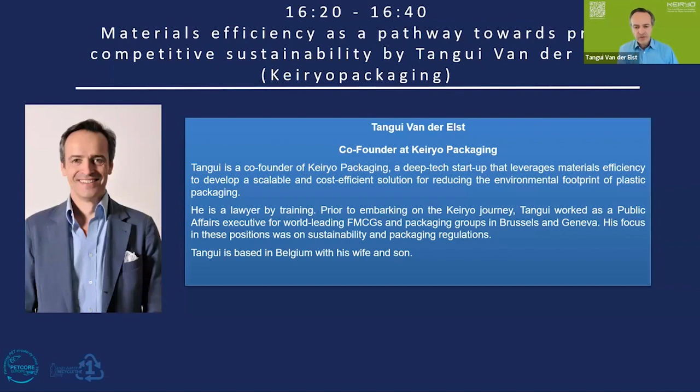So let me start with our presentation, Keiryo Packaging.

Just for clarity, I'll start with what we're not. We are not developing a new material, and we are not developing an additive. We are developing a processing technology that increases the performance of polymers.

That's what allows us to claim that our technology reduces the environmental footprint, but also the manufacturing cost of plastic packaging. If you look at the big picture of what we are seeking to create...

The founders, including myself, and the funders of Keiryo Packaging all have a background in the fast-moving consumer goods industry, more specifically in one company called AB InBev.

As you know, Roberto Johan, the CEO of our company, was head of packaging innovation at AB InBev a while ago, when there was a big push to develop PET for beer, not for Western Europe, but for other markets.

From that perspective of being responsible for innovation for a large FMCG company, he made this global perception that if you want a relevant sustainable innovation, you need to square a few challenges. First, you need a technology that reduces the carbon footprint and increases sustainability, but also that is cost efficient, because cost is a very important dimension in our supply chain.

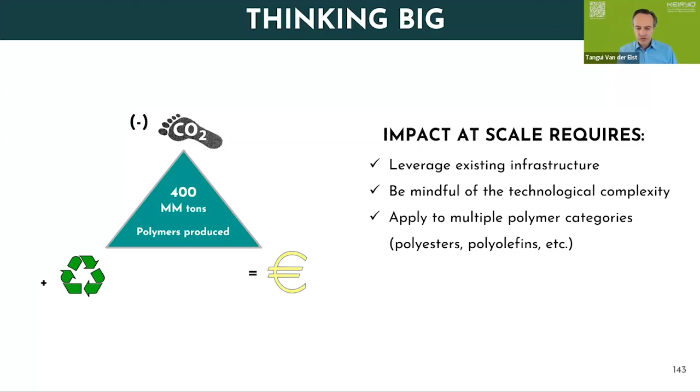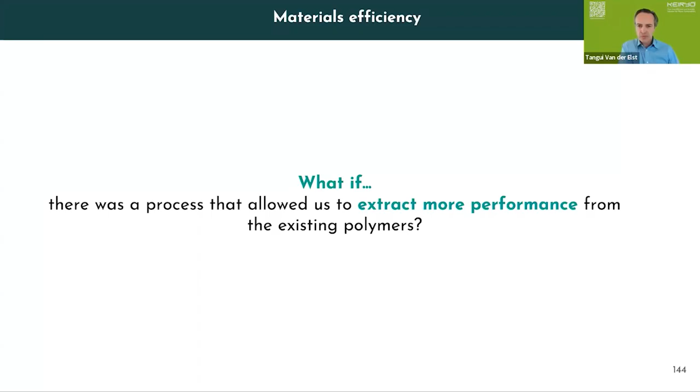And the second what-if was: what if there was a process that allowed us to extract more performance out of existing polymers? That would allow us to use existing infrastructure, you would not have to go through new regulatory validations, and because you have more performance, you're likely to have something cheaper and scalable.

Nature tells us something very simple: the performance of a material is defined by its morphology, the balance between crystalline and amorphous materials and how they are organized. Nature also gives a very good example of what that actually means.

If you look at the molecule of carbon, if you have carbon with a low level of molecular organization, you have coal. If you have the same carbon with a high degree of molecular organization, you have a diamond, which is better when you are in the market for an engagement ring. But fundamentally, it is the same material.

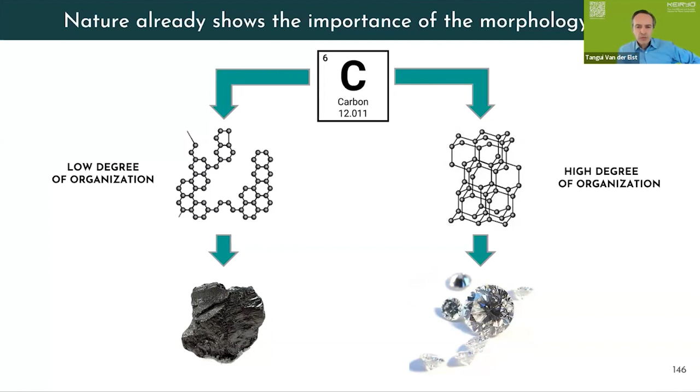What we have done is we have taken this principle and used it to convert the level of organization of polymers. It's a processing tool, and during the processing phase, the polymer is pushed through our device. What happens is that the low level of organization is transformed to a higher level of organization, meaning a different structure of crystals, a different way the amorphous components are organized.

This technology is based on well-established science, called flow-enhanced nucleation and induced crystallization. This science tells you that polymers have the ability to alter their crystallization kinetics and resulting microstructures when subjected to deformational flows.

Now I just want to open a caveat here. When we talk about crystallization, there's often a misunderstanding, because crystallization is not always seen as a positive development in industrial processing. There is a clear difference that needs to be understood between the best known crystallization, which is quiescent crystallization, and the crystallization that we leverage, which is flow-enhanced nucleation and induced crystallization.

If you have some time, go check our website. Our colleague Edita Niemczyk made a very comprehensive paper that explains the difference between the two sources of crystallization.

With flow-enhanced nucleation and induced crystallization, you control the flow to stretch and align the polymer chains to create a more uniformly spread nucleation, and generate crystalline structures that are smaller, better oriented, and better integrated in the polymer matrix. Whereas with quiescent crystallization, you have spot-like places of crystals that are not what you are seeking to achieve.

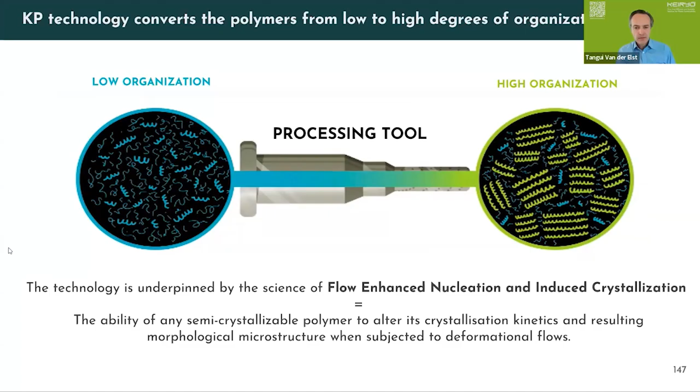What we have done today is demonstrate that we can apply this process to the field of PET injection stretch blow molding of bottles. If you look at the performance of a PET bottle, you're looking at mainly three buckets: top load, barrier properties, and thermal resistance. The amount of material you use is defined by the level of performance you need to achieve on these three items.

Today in our development, we have demonstrated that using a similar type of resin and on standard machinery, we can improve the thermal resistance of the blown article, and we can also improve the various barrier properties, whether it's oxygen, water vapor, or CO2.

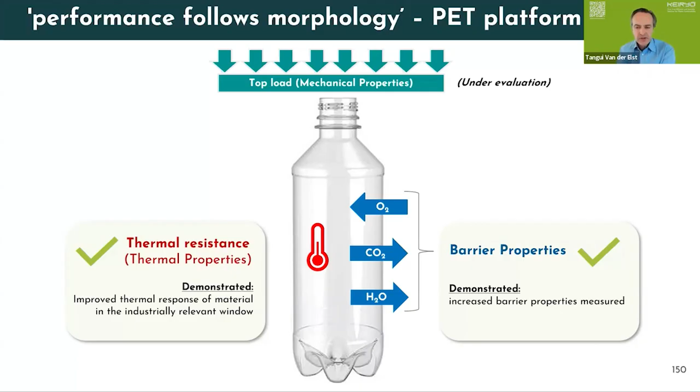The way this materializes, if you put it under a microscope: with the current process, you see this represents the morphological structure of a PET bottle. The blue rounds are crystals. In the current process, you have crystals of a certain size that define the passage that molecules of oxygen, CO2, and water will travel through to go through the membrane.

When you use the Keiryo technology to inject the preforms and then blow the bottles, you'll see that the size and amount of the crystals has changed. We have more crystals of a smaller size, which creates a more difficult passage for the various molecules. It's like a fishnet — if you reduce the size of the mesh, it becomes much harder for the molecules to pass through. And that's how you improve the performance of the material.

I will explain first how we managed to observe this, because this was in itself a challenge.

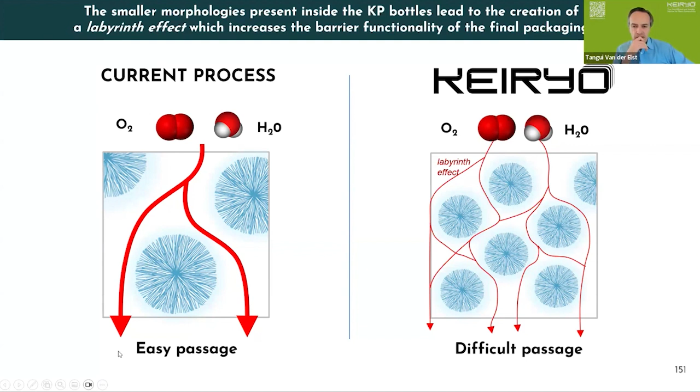Yes, so to measure this change in morphology, which leads to an increase of performance, we had to develop various evaluation protocols.

And rightly so. So we had to develop, next to measurements that are optical and thermal, protocols based on nuclear magnetic resonance to define the size of the crystals, and also X-rays to identify the orientation of the amorphous material. That allows us to have a picture, what we call the picture of the beast, which is basically seeing that when we use our technology, the morphology and the level of organization of the material is changed.

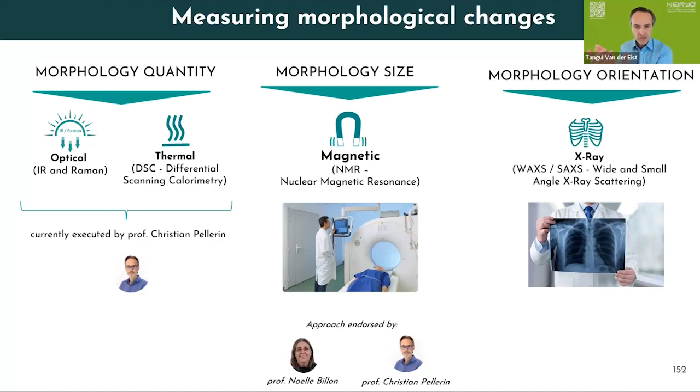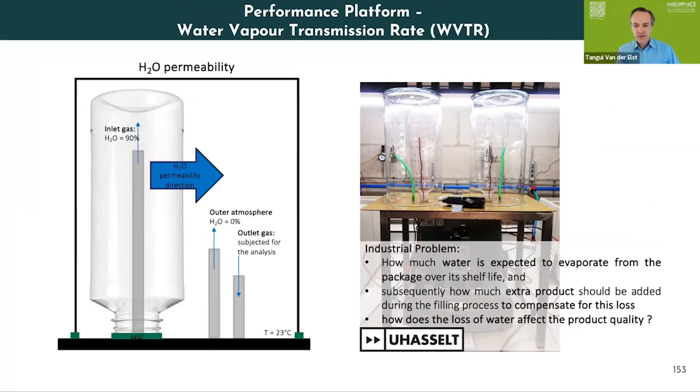We also obviously measured the performance, and for the sake of the presentation I will go fast on that. But basically what we do is benchmark preforms that are bottles made of preforms injected without our technology on the same machine, on the same resin, and then we inject with our inserts, and we compare the difference. We see an uptick in the various barrier performance, whether it's water vapor transmission or oxygen transmission rate.

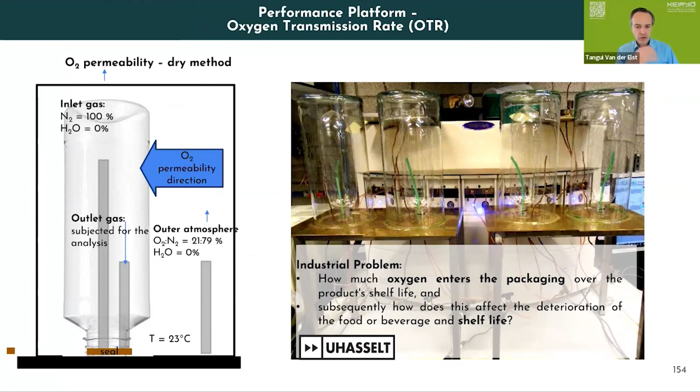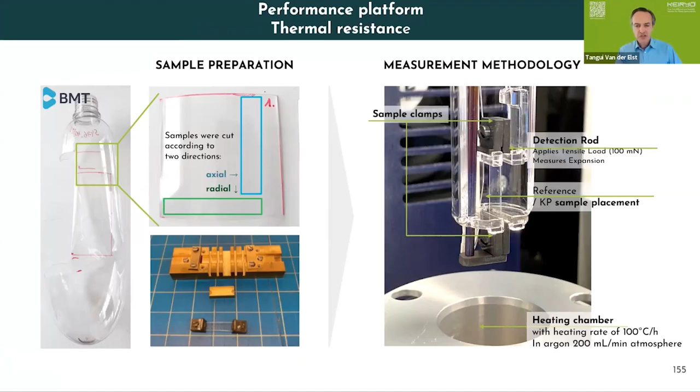Everything is done at the University of Hasselt, which has the right tool set to do these evaluations, but also of the thermal resistance. And what we've seen is that using our technology, you get thermal performance for a generic resin that is quite similar to what specialty resins are achieving.

What this leads to is, if you have an increased performance that is yielded by a better morphology, it unlocks two ways to create value. Either if you want to maintain the same level of performance, you will be able to achieve it using less material. That allows you to have, for each bottle, less CO2, a better footprint, but also a reduced use of raw material, which is thereby a cost saving. Or you can have the same amount of material, and then you will have better functional performance, which can impact the shelf life of your product if that is what you are seeking. But there are basically two pathways.

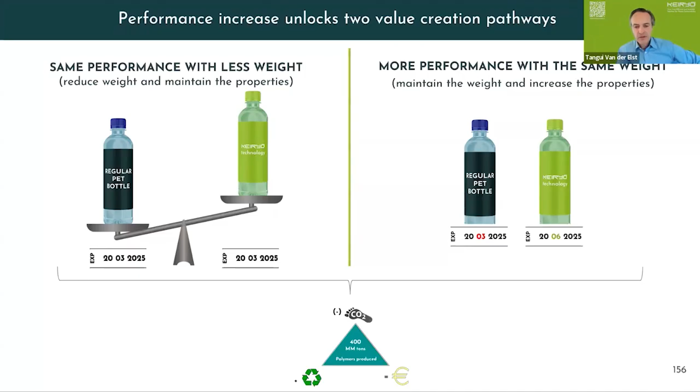Now, what we have achieved and what I just demonstrated so far is not the result of a test in the lab. This is the result of trials that have been executed in an industrial environment. On the picture here, you see the actual site where we are doing our trials, which is the factory of PDG Plastiques, which you might know. PDG is a French preform and bottle manufacturer based south of Paris, and we have been working with them now for a couple of years.

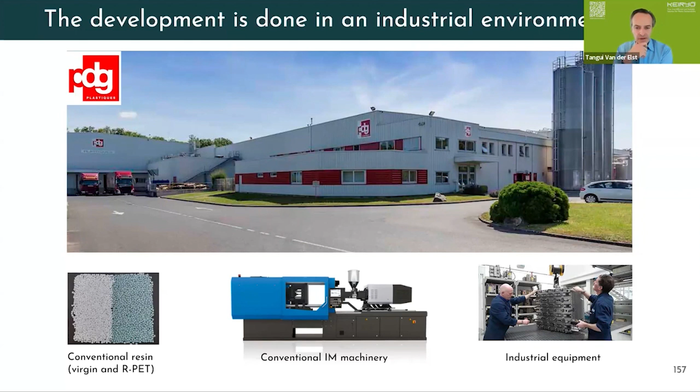And when we do our injection cycles, we use commercial grade resin, whether virgin or recycled. We do our trials on their standard machinery and within the remits of what the machine is supposed to do, and the machines are operated by their people. We add QCs because we are in a development phase, but the aim is to demonstrate that this technology can work in an industrial environment, that it is not changing the conditions of the machinery, that it's not impacting the production cycle.

The only component that we actually change is that we retrofit a 3D printed insert—there you have a picture of one of our older models—into the hot runner of the machinery. It is a 3D printed insert. What does it mean? It means we can design it exactly to fit different types of hot runners, and because it's 3D printed, it's fairly cheap to manufacture.

Today, in the small numbers of preforms that we produce for trials, we are under 200 euros for an insert. If you scale that up, you will have much lower prices. That allows us to claim that this is a technology that is intrinsically low cost, and also that can have a global rollout. Why? Because if it works on one machinery, at PDG, it can work in machines in Milano, in South America, wherever you want. We all know that the types of machineries used to manufacture preforms are fairly similar.

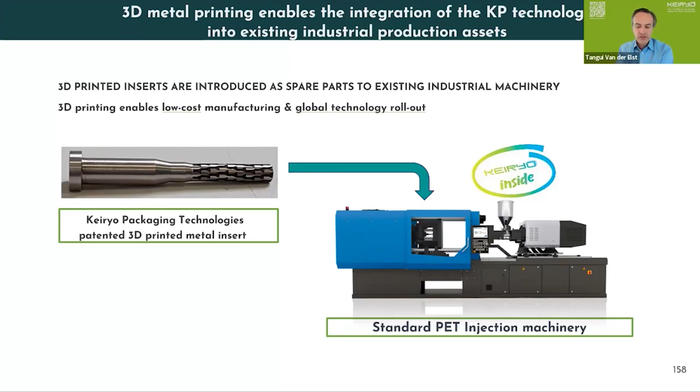It's also low capex because we, as a company, do not need to build a production facility. Today, the 3D printing industry that exists in the world has the capacity to produce enough of these inserts for the whole PET ISBM industry worldwide. So it's no capex for us, and no capex for our customers.

Just to summarize what I've said here: today we are not market ready, but we have demonstrated that this technology is validated in an industrial setting. What we do is multiply the validation points to get to a commercial level, and the validation points are about the validation of the platform and the validation of the performance.

The trials at PDG, we first did at the monocavity machinery because they wanted to be sure that we were not damaging their machines. Once they were confident enough that this was working, we moved to multi-cavity.

We've also demonstrated that our inserts can process the standard resins being used on the market. We have already done more than several hundred thousand shots, so we know that the inserts have the right longevity and maintain their performance over a long period of time.

In Q2 of this year, we will start doing what we call bespoke trials, where we will start testing on bottles currently in the market and used by one of our clients who is interested in knowing how this technology will work specifically for some of their packaging.

In terms of performance validation, we now have a very strong capacity to demonstrate and measure the morphological changes we generate, which are the source of the functional performance improvements. We have already measured a number of performance improvements, but this is an ongoing process. We work through testing cycles, and every time we do a cycle, we see an improvement in the morphological changes and then also in the performance.

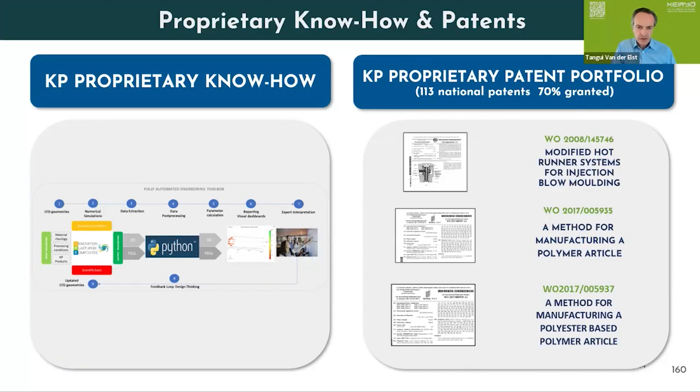We are also adding patents. We are now at the end of March. By the end of April, we will have a 4th family of patents covering an additional application, because one of the fun things about development is that sometimes you discover new applications that can also be very useful. While we were doing the trials at PDG, they said, maybe you can also solve that problem, and it turned out to be very successful. So now we are adding a patent on that item, but I'll be able to disclose more information about that in a month or so.

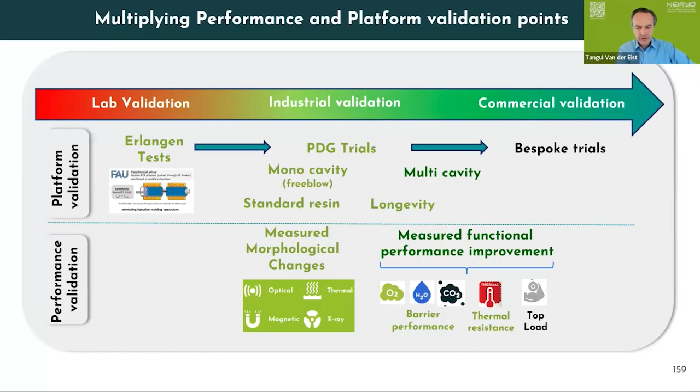And I pushed on the wrong button. Yes.

So the fact that we are an IP-driven company that doesn't have assets also influences the commercial model we envision. We describe it as a pay-as-you-benefit model. Basically, we will give licenses to our technology to our customers, and the price of the license will be a portion of the savings that our technology is generating. So there is no upfront payment to have access to our technology other than the sale of the Keiryo products.

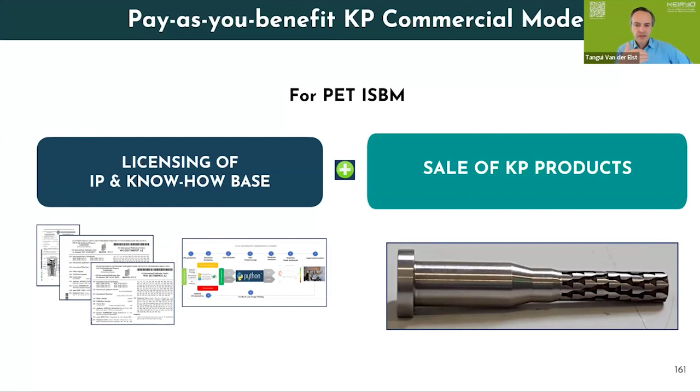But as I mentioned, these are small amounts, so it's not a capex, it's an opex. It will be a licensing model where you pay when the technology generates benefit to your supply chain.

Our team is a mix. We are based in Luxembourg, which was a wish of our shareholders, because being an IP company, the IP policy of Luxembourg is probably one of the most interesting in Europe. We have full-time employees for day-to-day management and engineers, and we also work with external consultants who are high-level experts in their domain, whether for IP, which is a big investment, or scientific leads like Professor Savas Hatzikyriakos, one of the most renowned experts in polymer rheology. We also work with a wide network of knowledge centers, like the University of Montreal, which does characterization of the preforms, the University of Erlangen, and IPC in France, which were instrumental in developing several components of our technology. As we move forward, we will onboard more in-house people, but this model allows us to be very lean while tapping into the best minds to develop our science and technology.

We have the chance to be supported by shareholders with very strong experience in FMCG, because they were CEOs of large companies or are majority shareholders of large FMCG groups. That's why they were very supportive of this concept, where you improve sustainability but do it in a system that is cost relevant, because they understand this is paramount if you want to deploy something at a large scale. It's not only about improving sustainability, it's also about being cost efficient.

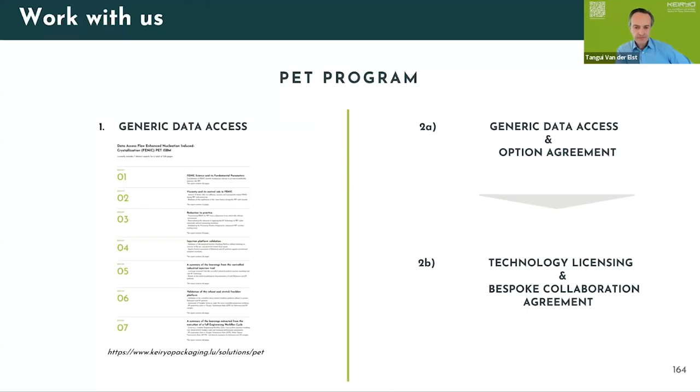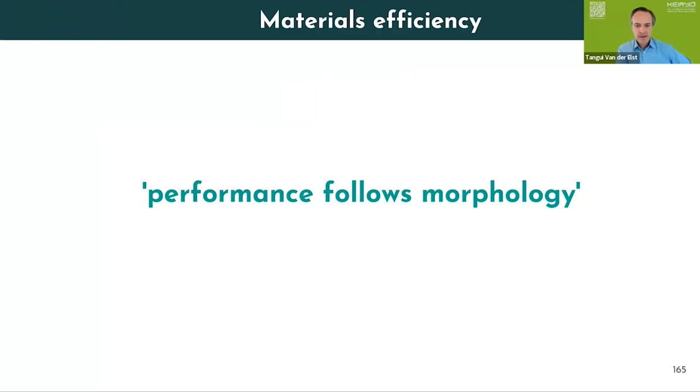So that's the last slide of my presentation. If you have to remember one item, it's that performance follows morphology, and that allows us to have a solution that doesn't require CapEx expense, that is inherently highly scalable, and that will yield a margin-positive sustainability solution. I'll add that we focus on PET, but the underlying science and patent base we have taken also mean this technology can be applied and developed for other materials than PET, whether fossil-based or bio-based. As a matter of fact, science tells us that bio-based material will be extremely responsive to the concept of flow-enhanced nucleation and induced crystallization. With that, I have completed my presentation, and I thank you for your attention.

Thanks very much indeed, Tangui. It's impressive what you showed, and it's impressive that by changing the morphology, you can change the performance of the final product, which is in a way unique. And when you say the company is IP driven, yes, but I think it is very soundly driven by scientific findings and scientific research.

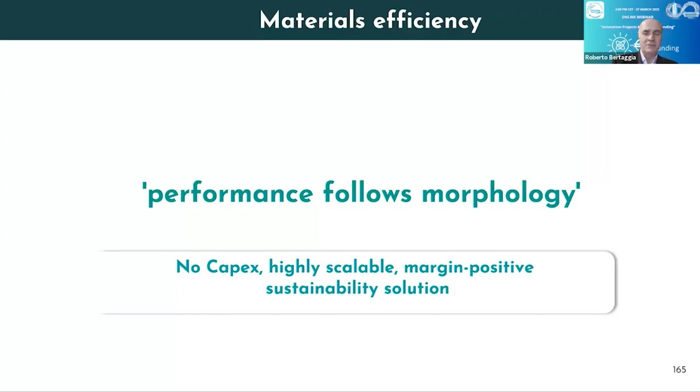There is a question from Sylvia related to the Keiryo technology: which packaging fields can the Keiryo technology be applied to potentially? I mean, potentially, which is the field where this technology can be applied? Is it only for injection molding, or can it also be applied to other processing techniques?

It can be applied to other processing techniques, but the focus of our development today is injection stretch blow molding. If you look at the underlying science, any processing technology that needs a flow and generates a flow would be subject to the science of flow-enhanced nucleation and induced crystallization. We have the modeling tool to design the inserts for other processing techniques. It would not be the same insert as for PET ISBM, but it would follow the same underlying principle. I would say the tools to build a processing tool for other processes already exist.

Yes, biopolymers as well, because the difference between biopolymers and standard polymers is only the nature of the feedstock, which comes from either non-fossil or fossil sources. Sorry, I thought the question was for someone else. Yes, in theory, if you look at the science, it works with biomaterials. We had long conversations with PLA producers, because PLA has performance challenges in terms of heat resistance. And so they saw the technology not as a way to reduce cost, but as a gateway to applications that are today not possible with the current way of crystallization of these materials.

So yes, we also talked with algae-based materials producers that want to venture into new applications, and they also hit performance challenges, so they're very interested by that. The difficulty is that to do that, you need to have a very good understanding of the rheology of your material, and that is knowledge that is very often split between the material producers and the processors, so no one really controls or has a full understanding of that. We've seen that some seaweed producers, for instance, don't fully understand their material, and if you don't fully understand your material, it's hard to apply the technology. In principle, yes, it is possible. I would say the main barrier is a barrier of resources to look at that.